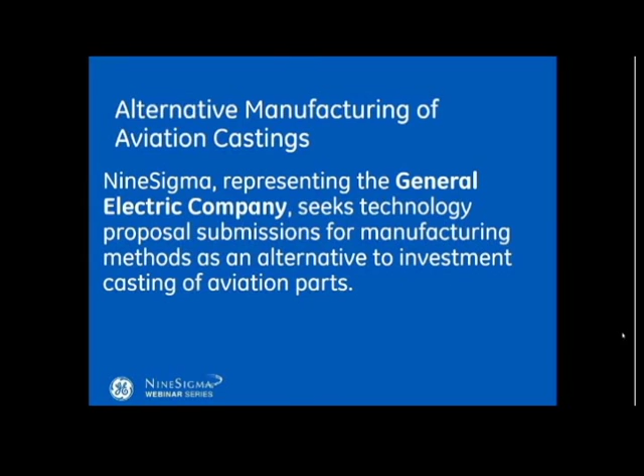My name is Lisa Ralph. I am our Open Innovation Operations and FastWorks Integration here at GE Corporate in our Open Innovation Center of Excellence. So that's a lot of words, but what I really do is look to scan the landscape both inside and out of GE to codify our best practices and processes, as well as manage a diverse set of campaigns across our portfolio on a day-to-day basis.

So open innovation is something that is new for us here at GE. The mere thought of reaching outside our walls a couple years ago was something that was crazy, but it's still novel, but it's something that is incredibly intriguing and something we are so excited to kick off. It's really allowing us to collaborate with brilliant people just like you guys on the phone and here on the WebEx and really work on some of our highest value problems.

So it's throwing the status quo out the window and really, again, allowing us to perforate the walls of our previous constraints and reframe what's possible. And so what's important to really underscore there is the fact that we're not just looking for ideas. The entire reason we're invested in this is outcomes. We really want tangible outcomes and to be able to bring these ideas, proposals, etc.

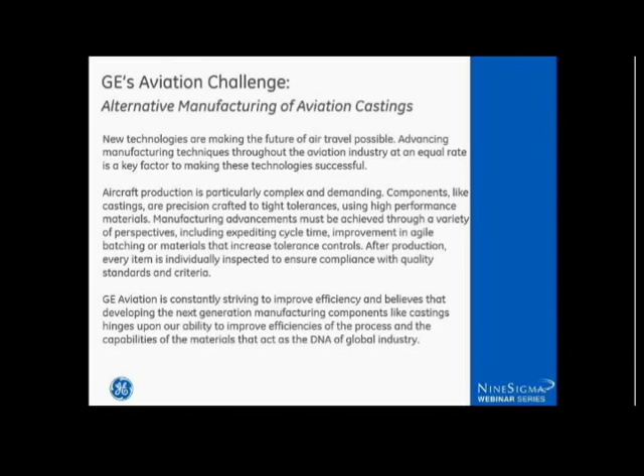Great. Thank you so much for that, Lisa. Now we're going to go ahead and turn it over to Neil for some information on the technical goals of the challenge. Neil, I think you're all ready to go. Okay, thank you. And thanks, Lisa.

I think everybody got a really good view of where overall from a GE standpoint we're looking at this process, and I'm really happy to be involved in it. I've been working on structural castings here at GE for quite a number of years, and I'm excited to have all of you involved now in looking at some alternatives for us.

So we can talk a little bit about structural castings, but GE is a longtime user of structural castings in the aviation and land-based turbine business, and for the most part, I would say that we've been very successful with that. But we've come to the conclusion now it is time to evaluate emerging technologies and process improvements that would give us potentially lower cost and possibly reduce variation in the products that we have.

And the goal of the challenge really is to identify what processes we could potentially adapt to produce product that would give us equivalent life and capabilities at a lower cost, and preferably at a slightly reduced cycle time and with reduced dimensional variations. And to expand a little bit about that, we've been using castings extensively on engines for years and years, and they've grown over the years.

I've been here for about 30 years, and the number of castings that we've used from the early engines to what we're producing today is significantly different. I mean, the number of them has expanded a lot. So I think what we're looking to you for, part of the goal, is to expand our vision on how parts could be manufactured. Do you have ideas that we've not considered, or maybe we didn't think would work?

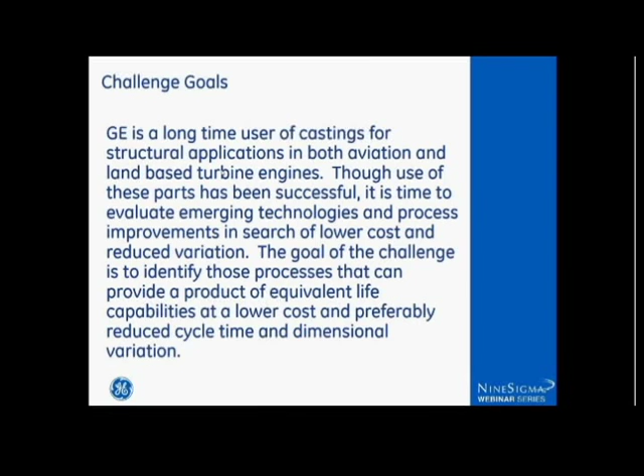So I'm going to apologize. I believe on the initial information, we identified the material correctly as 17-4 PH steel. Unfortunately, I think the first thing we sent out, I gave the wrong AMS specification number. I gave the one for 718, and I apologize for that. But the actual material for this particular part is AMS 5355, which is 17-4 PH.

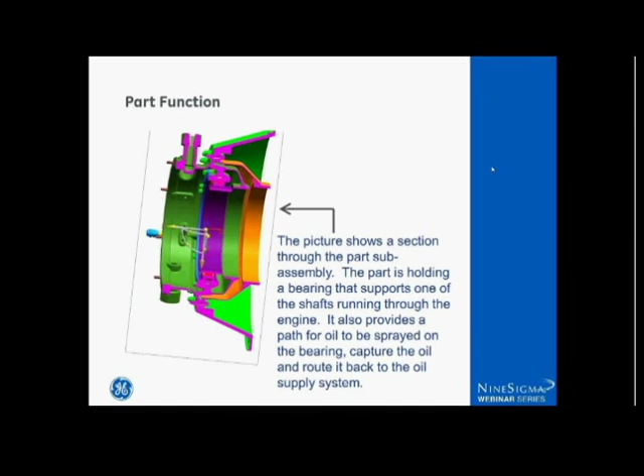And obviously, most of you are going to understand that this thing is made from stainless steel. Please don't propose aluminum, because I'll tell you right now, it's going to operate at temperatures that are much higher than it would tolerate in aluminum. So we would just note, initially take a look at the material, and if you want to make a proposal for a different material, that would be fine. But at least make it in line with the strength requirements of something along the lines of 17-4 PH. And I apologize for the confusion about the material spec. We have corrected that now, but just wanted to point that out. Okay, Casey, go to the next slide.

So just to give a broader view, this is what that subassembly bolts into. This happens to be the rear frame of the engine. And the subassembly then is bolted into the center section of this to hold it, and then the frame provides the remainder of the support to the bearing housing, as it addresses the entire engine. And ultimately, what happens is that through the struts, the oil is introduced down to that bearing housing.

So there's a path in and a path out for the bearing, and that's part of what the frame is doing then, providing those entrance and exits for the part. And so you can see that it's a whole component, and we are just looking at a particular segment of that component. Now, obviously, the operating structure of this gets kind of complicated. The loading can be very complicated, and so we're just asking you to look at 17-4 as a baseline.

There's a better concept to look through if you're going to look at manufacturing overall. In theory, it would be possible to add other components into this, and we'd ask you to identify exactly what you're proposing to produce. We'd then evaluate the proposal for impact on the overall product. At this point, we haven't provided enough definition for you to look too deeply into process optimization, like joining other components to the part we have. But if you see that as an option, point out that opportunity and we'll consider it as a follow-on change to the product.

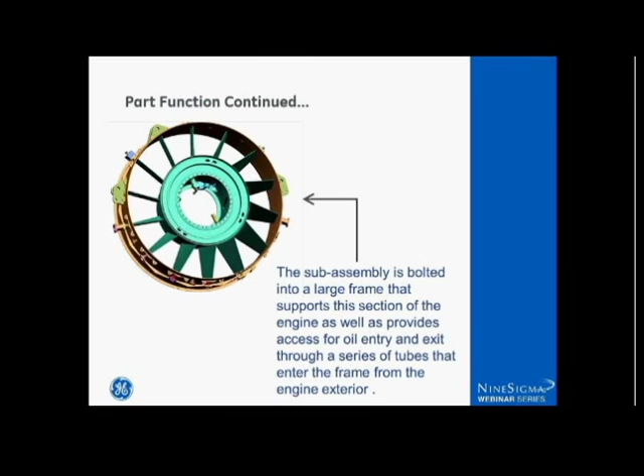We wanted to give a quick rundown of the casting process, for those who aren't familiar with it. The wax is injected into a die, and sometimes several injection processes go together to produce a product of this complexity—one for the internal part of the component and one for the external part.

Following the final wax injection, there's a cleaning process to remove die lines and any imperfections in the product. Then the pattern moves on to an assembly operation, where all the feeding lines for metal introduction into the part—the gating system—are added. Part of that provides structural support for the mold so it can go into the next operation, the ceramic shell building operation.

The ceramic shell build operation can put stresses on the part, between putting it into the ceramic and putting the powder on. So there's a strength component that the supplier sometimes has to build onto that piece. This goes through a number of steps, and following completion of all the layers, there's normally a drying period to eliminate the majority of leftover moisture.

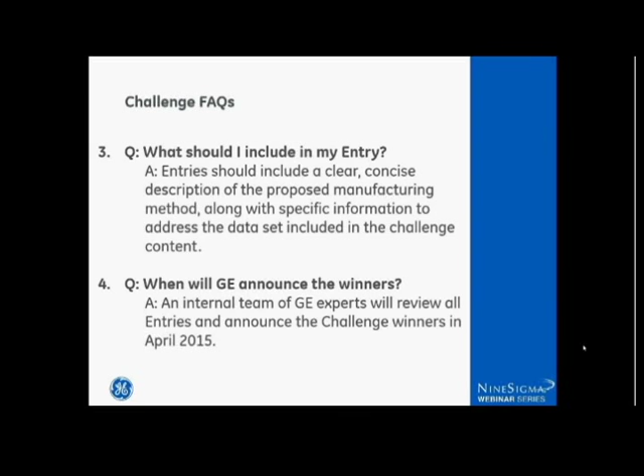Great. Number 4, when will GE announce the winners? GE is assembling a panel of experts to evaluate all of the entries, and we anticipate announcing the challenge winners in April of this year.